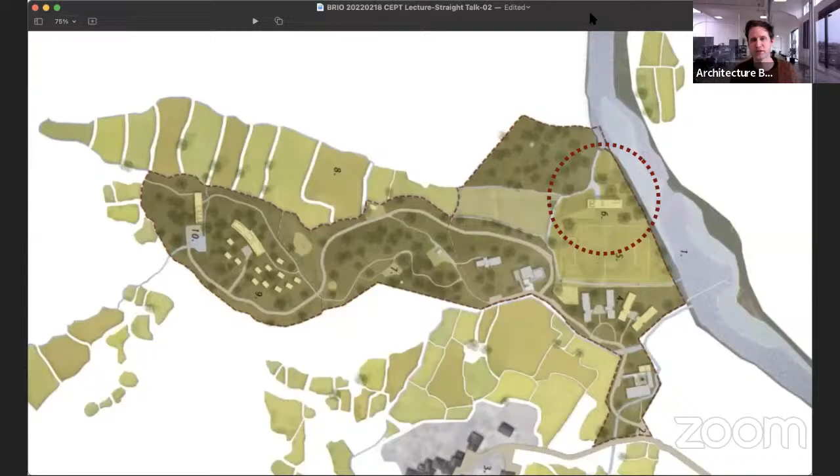While there's a forest and a big soccer field, many months of the year in this climate in Karjat it's so unforgiving - it either rains tremendously or it's so hot that it's very difficult to play any sports outside. So this pavilion is meant to create some kind of climatic shield to still allow play during those difficult months. We placed this pavilion strategically on the site, on the side of this campus, demarcating the dotted red line, at a place where three landscape elements come together.

There's a hill, a large lawn or soccer field, and a stream, and this pavilion is placed right where those three elements come together. In fact, it straddles across this stream - it connects on one side, the left side, to a hill, and on the other side, the right side, is the soccer field. And it really covers the stream.

There are several ways to get in and around this building. One, for example, is through this log bridge on the left side, and then you have to climb the hill and go up.

Another way is to enter from the... can you see my mouse, by the way? On the screen? Yes.

On ground level here, you can walk up to this deck from a jungle bridge, like a ropes bridge. And there's a ladder that takes you up to this level as well.

This building is ground plus 1, 2 floors. But in the submission drawings, we had a big issue, because when the government officials saw the drawings, they realized there were 2 floors but no staircases. So we had to explain that we don't want or need a staircase, because the landscape itself is a staircase.

This building is a challenge course extended into a building. There are other ropes courses and Jacob's ladders in this campus as well, and a zip line, and this is an extension of that. You have this log bridge that kids walk over, and these small elements teach children how to overcome their boundaries, because everyone has different levels of expectation and different levels of being adventurous or overcoming their fears of things they haven't done before. This is one of those.

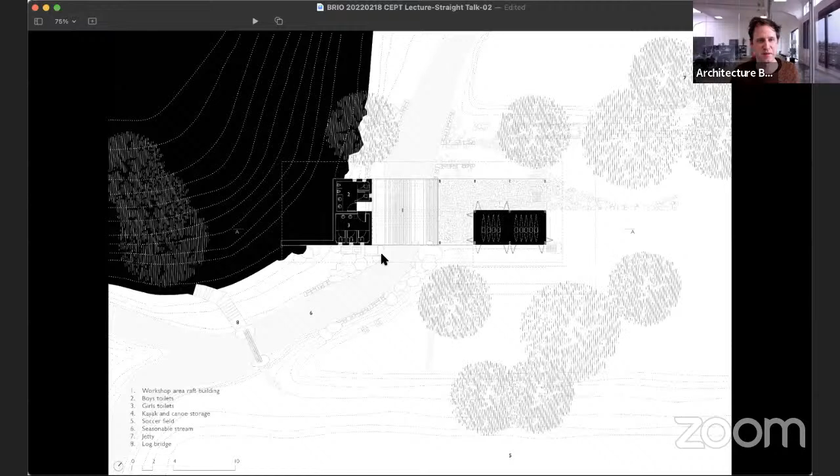Now, a rope bridge, we never designed before. We didn't know how to design it, and our structure engineer didn't know how to design it either. So we practically had to visit rope bridges and research how they are made. We realized we needed some kind of ropes underneath those planks, suspended from ropes above, from the roof. But when we started making models and had discussions with several experts, we also realized we needed diagonal ropes to prevent the bridge from swaying left to right.

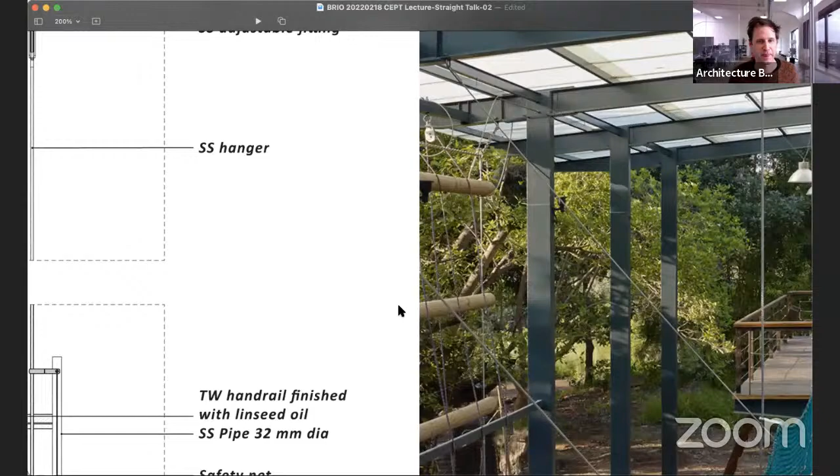And then here you see a detail, and I can probably zoom into this as well. So you see here the web of the steel member, and there's a bolt with an adjustable fitting that allows you to tighten the SS hanger. That's a rope, a steel wire. You see how it's connected here on the top.

And then there's also an additional plate, right? This plate actually stiffens the web of the bottom member of the steel beam to prevent it from sagging over time.

In India, there's not really any manufacturer you can go to and say, I want to order a rope bridge. So we went to the Mumbai port and spoke to several sea shipping companies, because they are very much used to working with steel ropes and fixtures, and we talked to them about how you can actually connect all these things together.

So this hanger goes down, and then at the bottom there's a wire holder. It is holding a T-section.

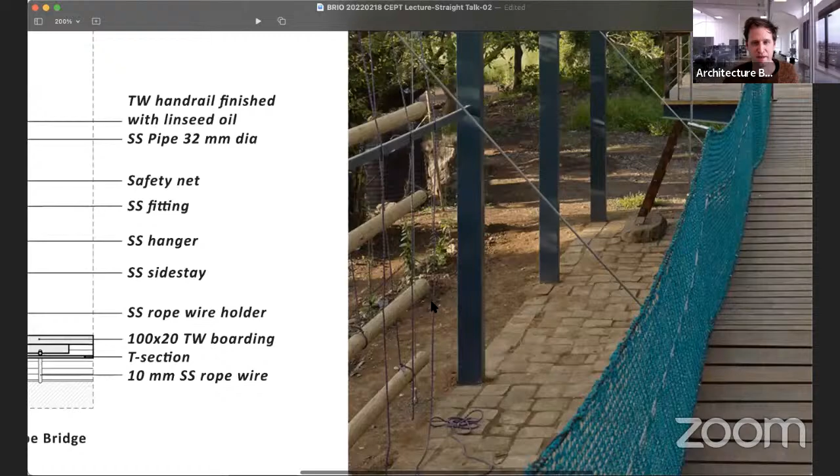That T-section then connects the wires on the diagonal, the straight one, with the wires on the right side, and it becomes this bridge. And then in the cross direction, you have several wires running in the length. On top of that wire there's an extra timber block, and on top of that is the actual boardwalk, the timber plank that you see.

This extra block below is there because this bridge is not a static thing, it keeps moving, kids jump up and down. And the wire is steel with a rough surface, and over time it will start rubbing off on the wood, and that wood will start eroding. So that extra thickness is really there to make sure the planks themselves never start eroding.

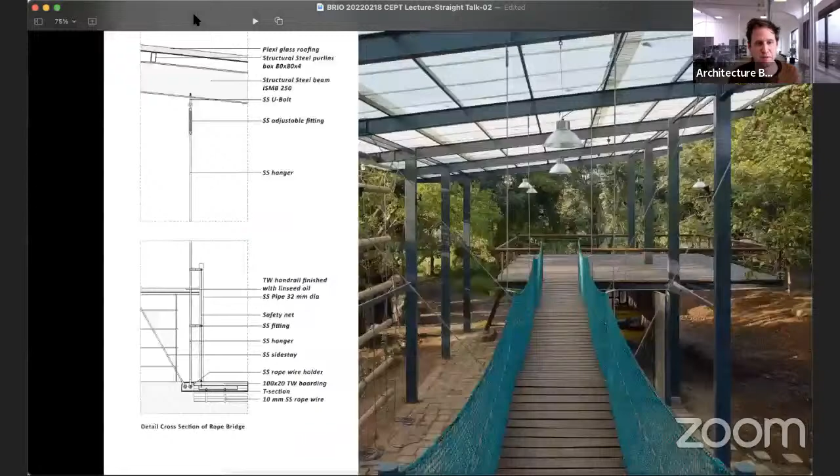Now, a bridge like this also needs to be maintained. It also needs to be checked every year to make sure that the fittings are still all right, and that they haven't corroded or loosened.

These are some of the fittings that we used in this bridge construction. And then you see here the project again in use, with more detail of that connection at the bottom. You can also see at the bottom of the bridge that rope below the thickened timber members.

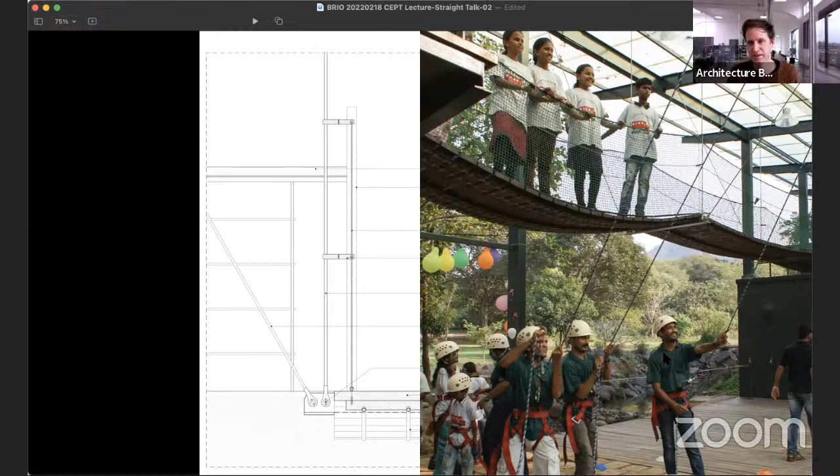For us, in this project, if there was any detail that was important from an architectural point of view, it was this one, because this building is all about connecting two elements of a landscape, a hill, a plateau, and covering this nala, this stream that runs below the deck. The bridge physically does that. So how can you make this a very light, easy-on-the-eye element that travels across these two directions?

But there's another detail in this project that we found important to show. There's a deck, and the deck is also the roof of a kayak stand. And of course this project has to be low budget, this is for an NGO. So how could we make a mesh screen that locks up these kayaks so that they can be safely kept?

You can see here another river behind, this is the main river. There's no fencing around this campus, so anyone from the village around can walk through the river. It's very shallow, and they can take canoes if they want to. So the only security we made was through this fence, a very simple L frame with a mesh fitted in between. You see here in the detail an L frame and then a mesh that's fitted onto that.

Now that was not an easy detail either, because that mesh that we bought actually came on rolls, and when you started unrolling it, it started all sort of bubbling. So often things don't work out that well, or they become very complicated and time-consuming to correct.

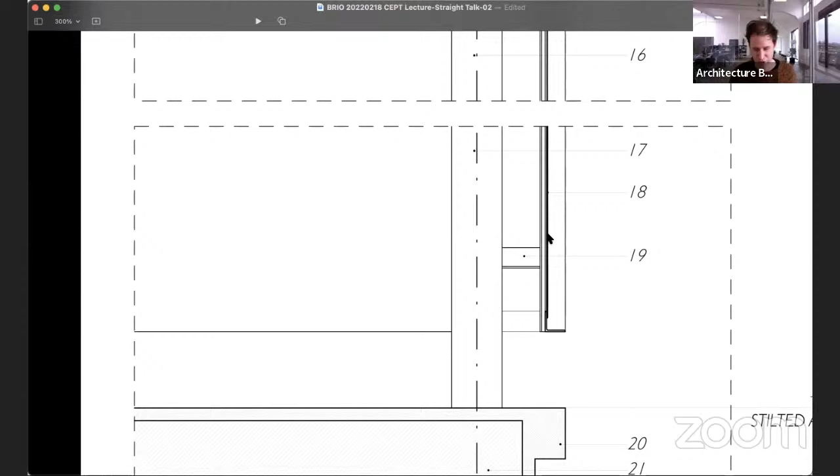This was a learning, one of our first learnings in building such a project. From then onwards, we started making mock-ups when we were doing things like this, things we hadn't done before and things that had to be tested out, so that we wouldn't have to correct each element after it was already made.

So that's the first project, and does anybody have any questions about this?

Does anyone want to ask any question? Do you have any questions? We want to ask how the bridge is stabilized, with vertical cable and a diagonal cable. On the other direction, what happens?

Okay Robert, I think then we should move ahead. Yeah, we should move. So do save up your question, but the next project I would definitely want a question from you.

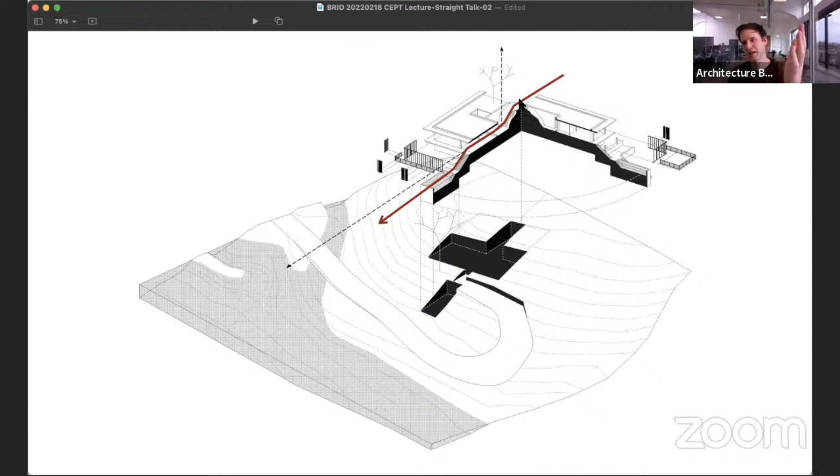You see again an axonometric. We have pulled out the building from the ground, from the hilltop, out of that black excavated portion. And then half of the building is sliced and rotated around the axis so that you can see really how it relates to the landscape.

The top of the hill is marked with this red line - at the back there's a courtyard with a rock-cut staircase that runs through the kitchen, through the dining room, down the staircase, over the pool, and then further down into the landscape. And then these lighter elements, like the decks and the windows, are pulled out of that axonometric again.

Now here you see pretty much all the materials that are in this project. You see a stone wall, this is limestone. Then you see this thin concrete edge with a bigger beam that retains the soil above, and you see a steel beam here at the bottom that you see in section as well.

In the section you see also that stone wall behind there. You see the bamboo screen that hangs from the roof and is connected to the beam on the side here. You can zoom into it.

So you see that this deck here with the timber planks is not supported on the ground, and that's really to make it look and seem as light as possible. This beam is actually suspended. It's suspended through a rod, this rod that you see here, which is fitted on top in the slab.

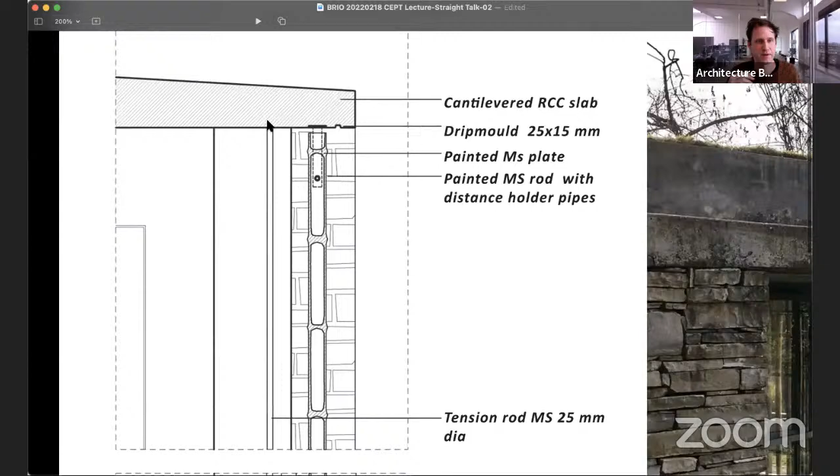And then to the side of the beam, there's a vertical plate. That plate has a hole in it, and that hole has a rod in it, and the rod has small little pipes, and between the pipes are actually the bamboos that are sort of arranged like a chain. So let me see if I can zoom into that as well.

So you see here a little bit that plate, that vertical plate, and you see there's a rod with the pipes. The pipes are there to actually keep the distance between the bamboos. And wherever that plate is, these pipes are again halved, so it sort of separates the pipe again, to keep the bamboo screen in place.

There's a plate here and another plate over there, and then you see this on top, it's suspended from the slab. Now, we didn't actually know in advance exactly where we were going to have those plates suspended. So what we've done is we've actually cast a whole steel strip in the slab so that we later could weld these vertical plates in any position along this slab. It allowed us to be flexible there.

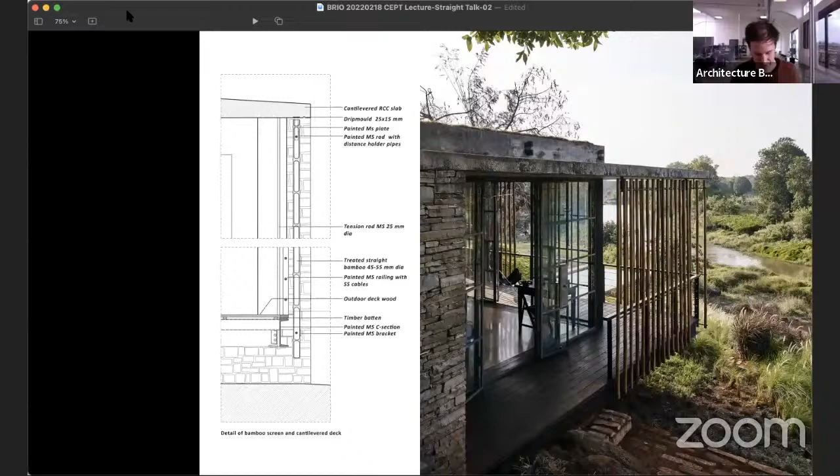Yeah, you can actually then see also here on top that plate that is cast in the slab. The drip mold, which is of course very important, because otherwise you get streaks of dirt along the inside of the slab. This allows the water to drop down before it hits the bamboo.

And here images from the other side. And here what I want to sort of show, what you see much more clearly, is these suspension rods over here and here that are holding up the veranda. You see it here once more.

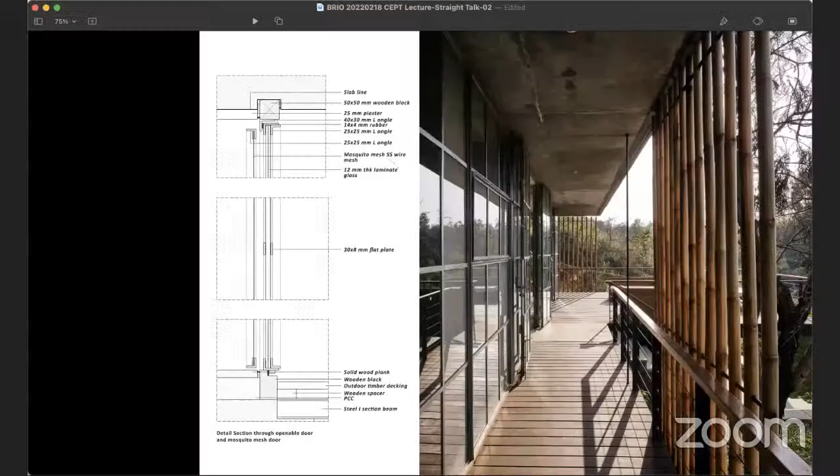You see that the bamboo has actually three of these rods running through. One is at the bottom, straight, and it also has the ability to even move after installation and warp. So this keeps the bamboos in place over that full length, which is, I think, 0.9 meters, if I remember correctly. And then, of course, at the top as well, where the ends are connected together and where it's suspended from.

Now here on the left, you see a detail of the windows. The windows that we made for the previous project were in steel with a steel mesh inside. Here we, for the first time in our projects, have used window frames made out of steel with glass infill. And in the past, I think even CEPT still has windows, steel windows with glass, but not anymore.

Does it still have it? Yeah. So it's not very generally used, but what we really wanted to emphasize was a sort of a mesh of glass and steel around the side of the house that faces the river. And the only way to do that as thin and elegant as possible was with steel members.

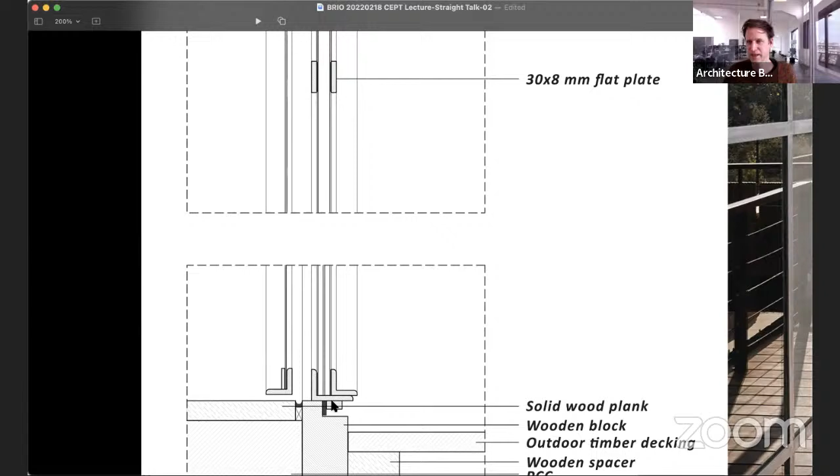So the beading of a frame is 25 by 25. And then the outer frame, the fixed frame, is 40 by 30, and then there's a fixed frame outside of that, again 40 by 30. But to make a window that is also sealed, you need to make sure there are overlaps and there are no gaps in the windows. So there are additional elements, like for example here at the bottom, that prevent water from going in from outside into this floor. Little beads that are connected to the steel that are creating an overlap.

You see here from the inside, the openable doors are swung to the outside, and then there's another set of doors opening up to the inside, which is a mosquito mesh. So it allows you to keep the glass windows open but close the mosquito meshes so that you still have ventilation. This is a quick video of how that actually functions. This is the master bedroom.

Yeah, so she's very enthusiastic. You can see her opening and closing these windows and the mosquito meshes.

Now, when you have such a thin frame of 25 mm, you cannot fit normal hardware on it anymore, so you have to start customizing this hardware. These, for example, are bolts that lock the doors in place. You see a little hook on which they rest when the doors are open, and then they can be lifted up, turned around, and go into the floor to lock them in place.

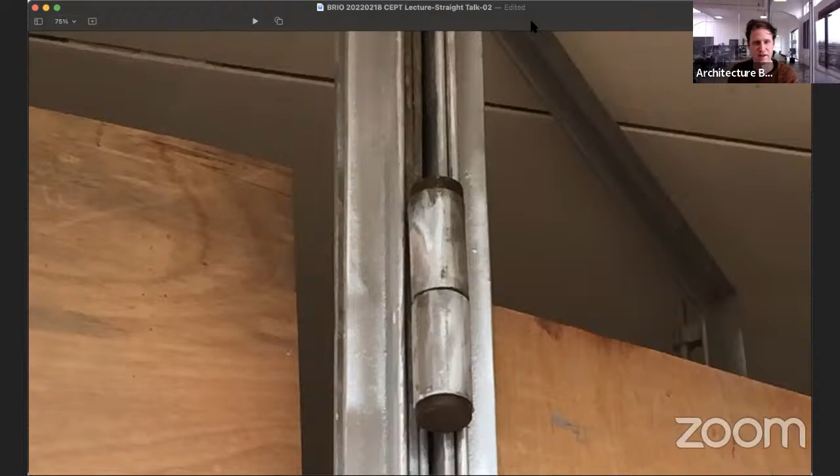Not everywhere was this successful. In some places, the process of hot dip galvanizing didn't work - it got damaged too much. If a really large part of that galvanizing layer gets removed, it doesn't heal back. In places like hinges, we couldn't hot dip galvanize it, so we had to improvise with a zinc paint, which is eventually still a paint, so it can still come off.

Yeah, it's not the most ideal solution. We were also very worried about how it looked eventually, because you see a difference in the finishing of the part that is sprayed versus the part that's hot dip galvanized.

And then you see here a bathroom where there's a different kind of window. This is facing the view again, so we wanted to make sure we could look over the windows to the outside even while showering. But we also wanted to make sure we had the possibility to ventilate it. So here we've used a system which is like a casement stay, a bracket, a friction hinge that opens up. And then between the bathroom and the master bedroom, there's cabinetry that's inbuilt that doesn't really have a brick wall - it's just cabinetry that separates the two spaces.

So any questions about these details, about the making, or any mistakes, or any questions about the process of making this?

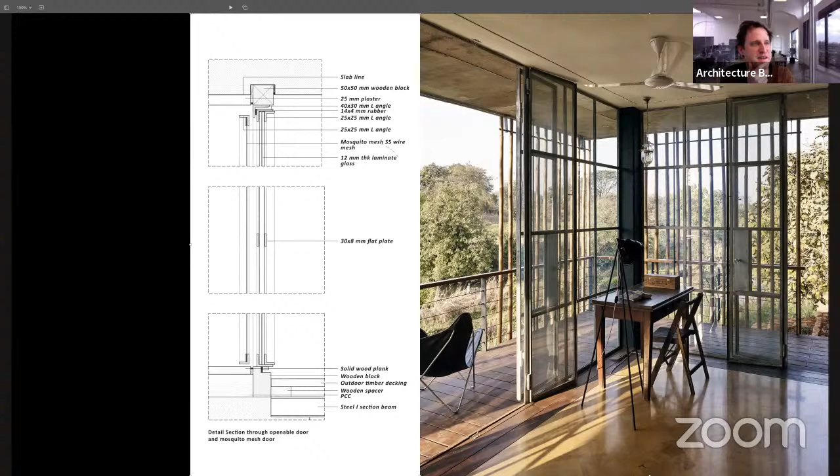So actually, at the bottom of the foundation, I can make a quick drawing. Since we are here, can I do a quick drawing? Let me see if I have the possibility here. You can annotate. Yeah, I was trying to find my annotate button now. The button is somewhere, but where is it on the screen? Usually I can find it, this time I cannot find it.

Yeah, thank you. The point is, what I try to explain is, it's intensive, right? You have to do a lot of architectural work, a lot of construction work to eventually allow a building that sort of hides, that's embedded in landscape. But eventually it also makes sure that nature can grow back and grow over and around the building. While this temporary disturbance to the surrounding is there, eventually over a long time, you have a building that is much more nature centered in a way.

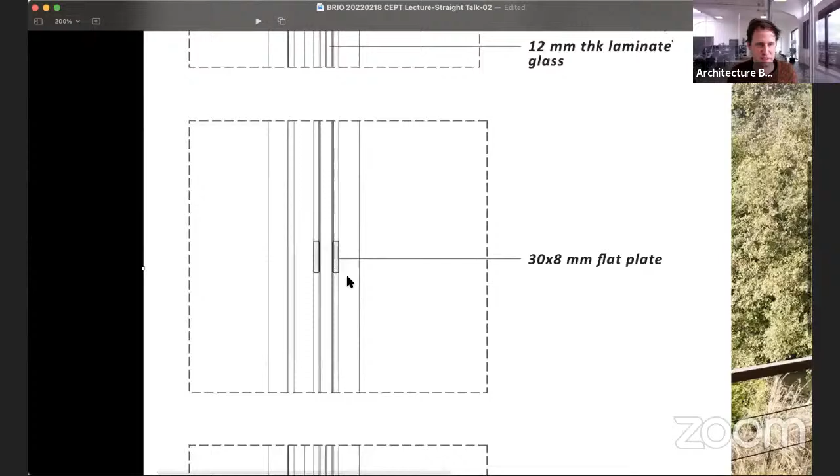We didn't really need it for thermal expansion, which is what you also asked. Although there is, of course, also a gap here - I'll try and show you. If there's thermal expansion of the steel, it could expand to the top; there's a small gap there that allows it to increase in height. But the steel window is protected from the overhang from the sun, so it doesn't have a lot of heat gain, so I wouldn't expect this to really expand.

Yeah, I hope that answered your question. Yes. Yeah, Tarun.

Hello, hi sir, I'm actually not from CEPT, but I have a question. The details here are really detailed, and you can't really do it if you haven't planned before, so all of the things have to be ready before you start construction. How long did you take to figure out this entire project? Just to know the timeline of how long you had taken to detail all of this, just out of curiosity.

I think our design process was 1.5 years, if I remember correctly. But it wasn't because of this detailing, actually - it was a design process that was long. It was a stop and start design process where we had several iterations of requirements from the client, smaller house, bigger house, small again, bigger, and then also waiting for the local panchayat approvals.

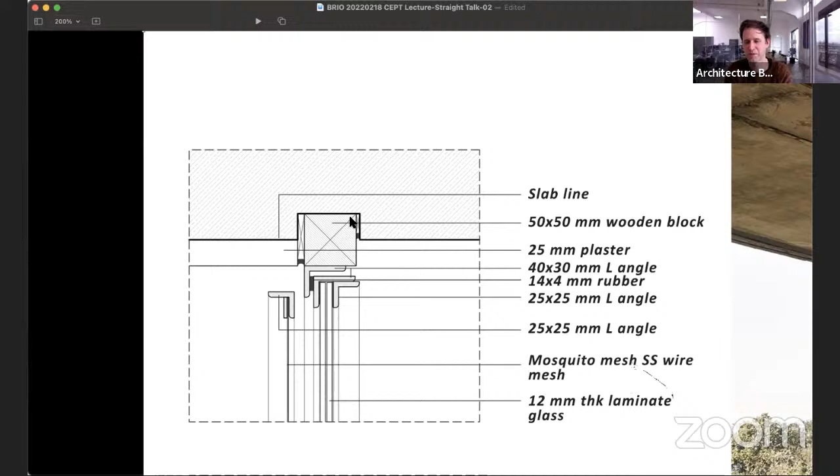Yeah, you're right, all this has to be planned before. If you don't plan that cavity in the shaft and you have a mistake, you won't be able to rectify it again. Thank you, sir.

Anyone else? Maybe I can ask a couple of questions for the students.

One thing you need to ask is, let's say, a very interesting detail of one angle section overlapping with another angle section, because earlier Z sections were made, and that's what CEPT has. But this is again a very interesting way to deal with two sections, because one of them acts like a beading putty if you treat it like a timber section. So one question would be how is that outer angle section, which is 25 by 25, fixed onto the main angle section, which is the frame of that opening? Yeah, that's right. Do you have a picture?

Yeah, you see here that this is our improvisation to the Z section. These beading putties that are on or between frames, because typically a Z section would allow you to have this piece to create the overlap with the fixed frame.

The question you had is about that inner frame - you see the hole there. It's a grub screw, a screw that you see in the screw hole here, here and here. That's how they are connected to the side, because you can't screw into the window, you have to screw vertically.

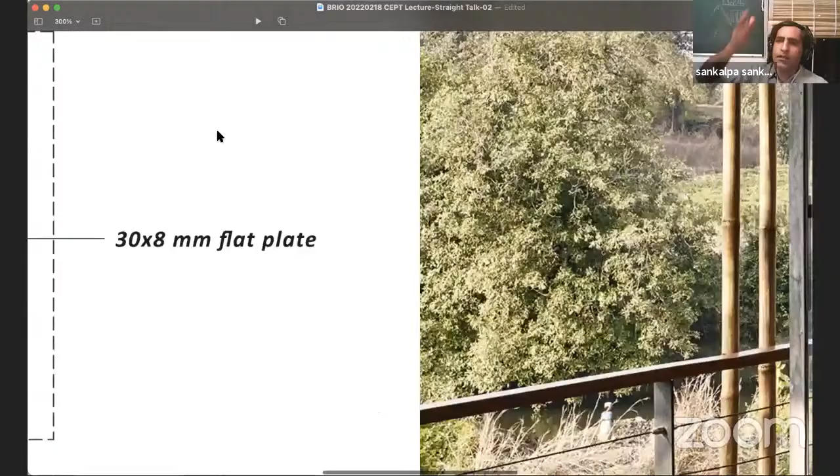Now the second question you need to think about is if you look at the mesh and its size, and at the beading putty of the mesh, it is a plate. Generally plates are slightly difficult to handle in steel. So one question is how the mesh is done - sometimes it's stiffened by rolling a plate and then you screw it. But in this case it's very light and uses a plate, so how is it fixed? Is it directly grub screwed into that section?

I can show you in the picture, though I can't zoom in more. Yeah, it's there - that's how it's screwed. So it is fixed, fixed horizontally through the mesh, which also makes it difficult, because if you have to cut the mesh it may get damaged, and potentially those fine little lines of the mesh may get damaged, right?

It's also difficult - we need to see, because at the corner conditions, if you've got plates folding the mesh into the plate, the corner conditions become tricky. So what I'm trying to point out is that once a detail is shown in 2-dimensional, you need to think in 3-dimensional in order to address it - connect back from the back.

So the third question is that if you look at the outer section shown, the channel section was being lifted from the slab using a pipe - outside, where you were showing the outer layer with the bamboo screen. That section, the questions immediately start coming: the channel section is resting on the pipe, so obviously a lot of questions emerge about its stability. Is it intermediate resting, with members on the corners that have a support, or is there some intermediate support for the channel you can't see in the section?

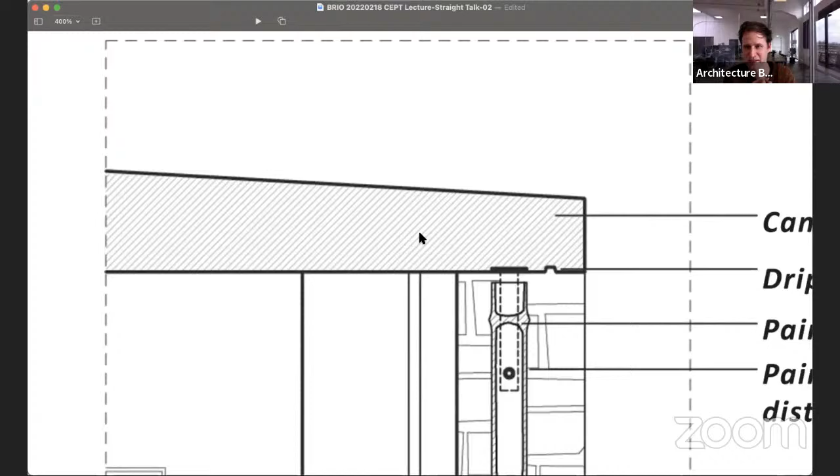So from a sequence of construction point of view, it's amazing, no? Because if you look at the bamboo screens, there's a plate running that was thought about. Similarly, the precision of getting these two rods, because it connects to the reinforcement - all of this is a great challenge. Constructional tolerance is quite interesting - how has somebody thought about it sequentially to anticipate where all the errors would be, and how do you negotiate the error? For example, the niche in the timber in the inner section, in the slab inside - and then you start seeing this vertical member.

So this female threaded joint has to be exactly in this right place. If it's a bit to the left or a bit to the right, the rod will not be straight. I don't know exactly in this picture whether the bamboo was not straight or the rod was not straight, but you can see that they are not exactly in the same plane.

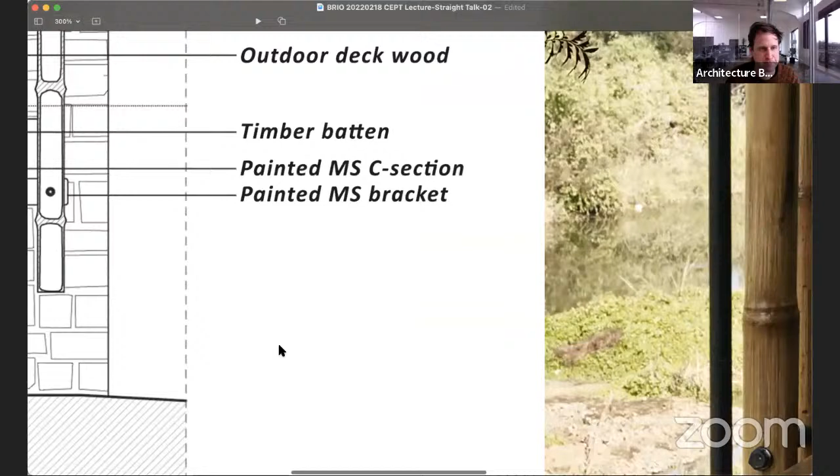We need to learn, when we are doing this, in which direction there is tolerance and in which direction there is not. You can't play around too much at the bottom because you have the railing—if you had to move the bottom joints of that rod to the left, it would hit the railing. To the right, you could still shift it a bit, because in this drawing the rod is fixed to the back of the beam, and you could keep a little smaller or bigger gap than required. In the other direction, you can place the rod wherever you want along the beam, so there you are allowed some tolerance, but not really in this left-to-right condition.

And so I do know that one of these rods is not perfectly aligned. I remember being really annoyed with that. Yeah, tolerances are something so difficult in construction.

The bamboo is hollow, no? Or is it solid bamboo? It's hollow. It's behaving all right in terms of cracking? In terms of cracking, it's been behaving very well.

We did several different kinds of coats over the years on it. Initially we did an oil, if I remember correctly, and the oil worked well but not in the monsoons—after the monsoons you would get a lot of mold attaching to the bamboo. Then a year later we did a varnish over the bamboo, but we used the wrong varnish because it started melting in the hot season. So it became a little sticky, which attracted lots of little bugs and dust that got stuck into the varnish, which then became nurturing for mold over time. So the year after we had to strip that down again, and then we went back to oiling.

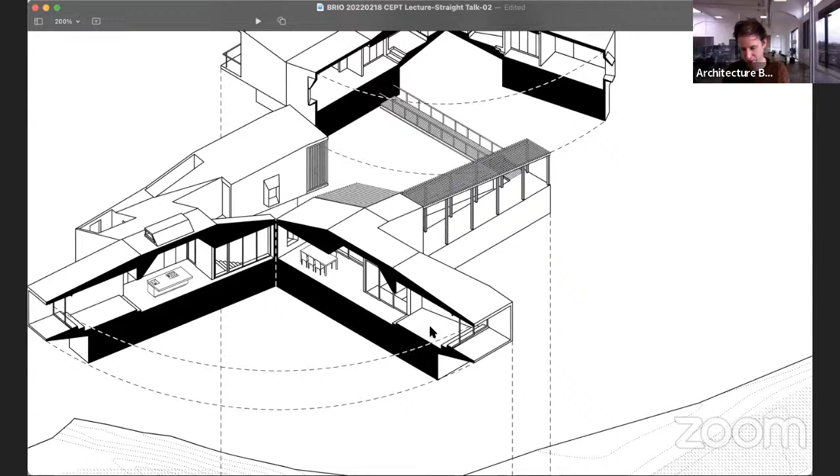Here the exploded axonometric is in two parts: the main house and the annex, which has a master bedroom, are both extruded, and then again they're folded out so you can see the inside of the section of this house. You see how we're playing with volumes where there's a very strong difference between the inside volume and the outside volume, emphasizing what is termed a poché, which is the space between the inside envelope and the outside envelope.

And that's also emphasized in the materialization, right? So the inside envelope is all white, all white painted surfaces, and the outside is this raw concrete—much more rough, solid and monolithic material that encompasses the entire building.

You see the middle section here with that emphasis of a sloping roof, a roof that sort of expands out into the landscape through different arms of the building. They're almost like an insect stretching out between different existing trees. And then an inside surface where in some places it's just a plain flat ceiling, and then in the center of the house it sort of expands up, reaches out, and opens up.

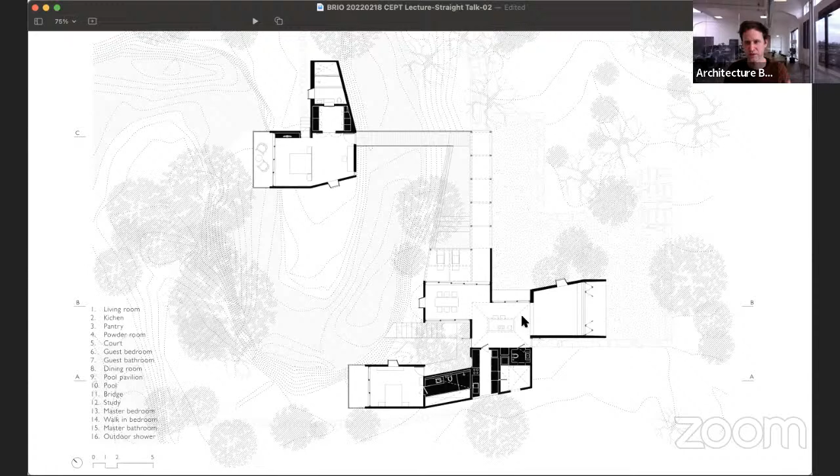This is happening in the plan as well, this expansion and contraction and shifting of axes across the plan to create a dynamic relationship with the land. That's what you see in this picture too. You see an axis towards the courtyard, a diagonal axis across the main kitchen, but also a linear axis from dining to kitchen to living room, which is raised a little bit, and then the vertical axis of this pyramid shape on top.

There's very bad soil in this place of Alibag, called black cotton soil, which expands and contracts depending on the seasons, depending on how wet the soil is. You have to go down with your footings, your foundation, below that soil layer, so that the building doesn't settle one side in a different way.

But then on top of that, you also have this stream that runs through the building. The stream is now nice and gentle, but it can also become a very violent stream that fills up almost touching this bridge. There's an enormous amount of water rushing down the mountains, pushing against these walls, pushing against the concrete, so that concrete is extra heavy, placed on the bottom strata, on the stable strata.

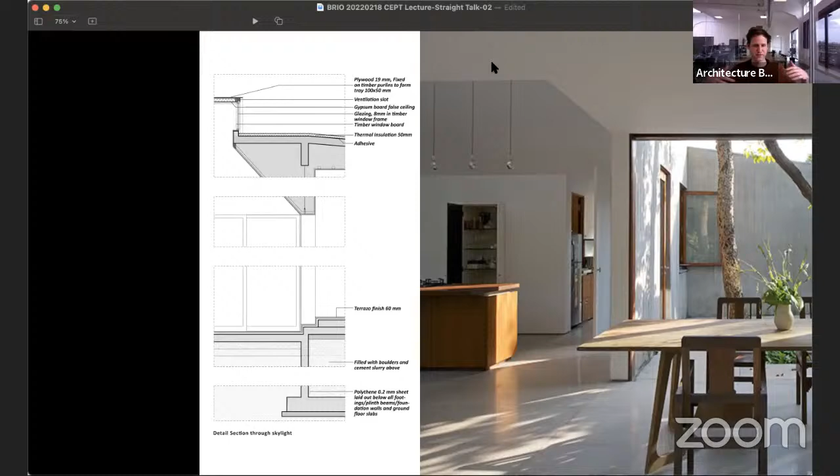Yeah, and in a way it's very simple, right? It's just plasterboard on framing that's hiding behind all this whiteness here. But still, when you're in that space, it feels as if it's sculpted out, as if you're walking into the inside of a boulder, into a cave.

But then it expands, and then it lifts up. There's a skylight which floods the space below, and of course the skylight is the most risky thing you can do, because it always leaks — at least as long as you haven't detailed it properly. But what we did...

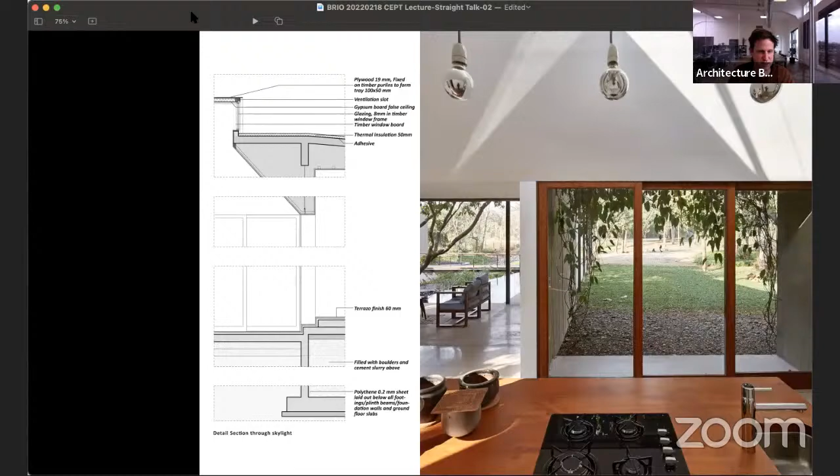The roof structure is a timber frame, a sort of boxing of different frame timber boxes. There's a gypsum board at the bottom and then a ply sheet above.

Then this is filled with insulation. Of course, there's insulation on the roof itself, otherwise that concrete slab would heat up a lot.

There's a small gap between the insulation and the plywood to prevent dampness or moisture build up. And then that is covered with PVC membrane.

Then there's an L section that creates a drip mold that makes sure that the water that falls over this edge doesn't fall directly on the glass.

And you see here a timber frame and a timber frame again. This timber frame is actually more of a schematic drawing. Eventually, this timber frame also overlaps with that upstand, because otherwise you would have water that sort of seeps through.

The gap that would eventually be existing here through expansion and contraction.

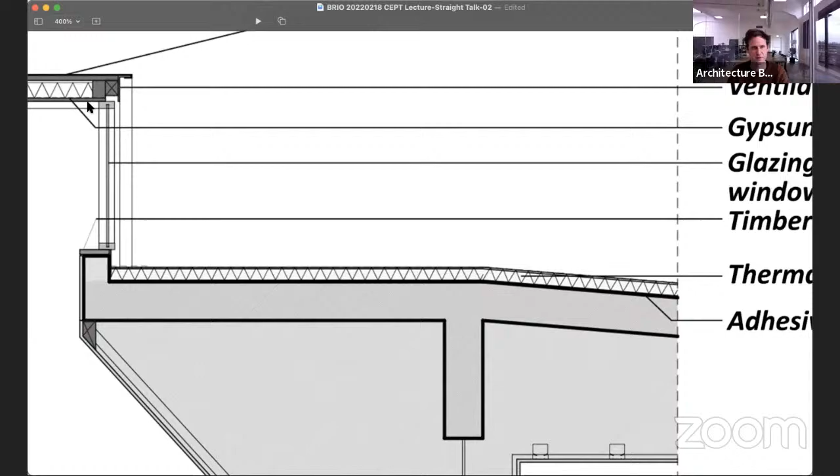Going back to this, yeah. Everywhere in this building, we either have only floor-to-ceiling windows, sliding windows, or these kind of doors that are floor-to-ceiling.

And wall-to-wall. But in some special cases, we have small punctures in a concrete wall, which are these sort of window boxes. And these window boxes we wanted to create as elegant as possible.

So, and as simple as possible in a way. So it's a steel box with two straight sides and two sides that are chamfered.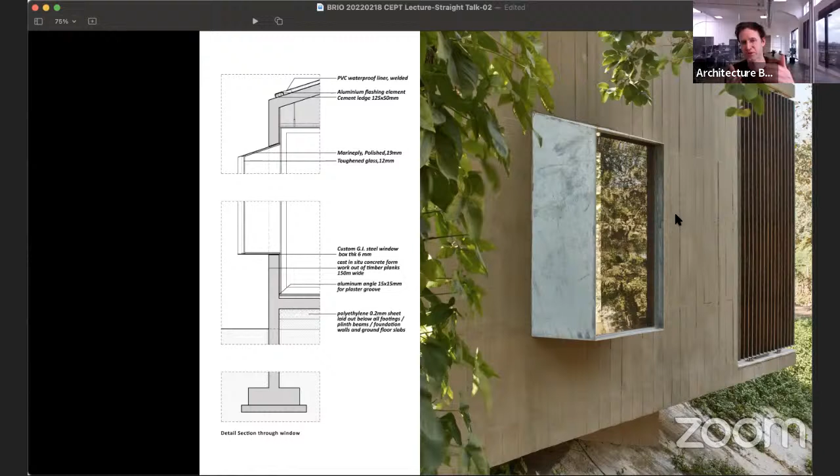The top side is chamfered so that it allows water to drip down. And the other side is to really visually create a cone effect from the interior to frame the view more dramatically.

I'll show you here from the outside how that looks. And these boxes are placed in plan in certain axes.

So here you actually see through a series of spaces, eventually through an outdoor shower courtyard over here. And then even a small little shotgun window in that shower that looks outside.

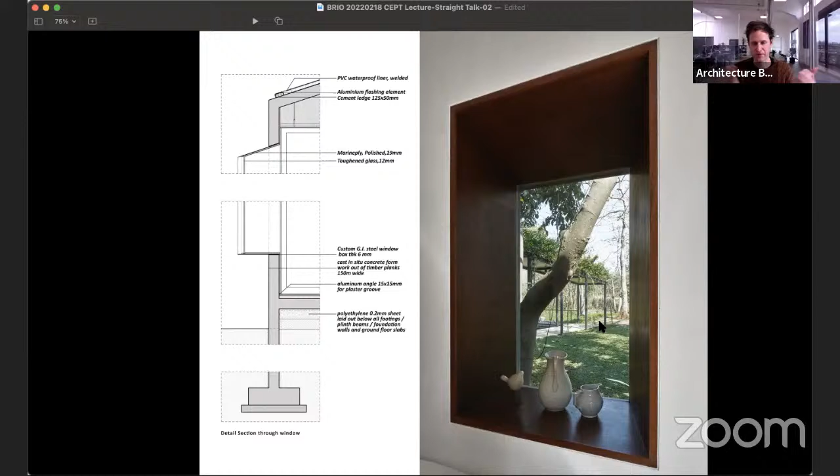And here from the inside, you see how that framing, the cut-off pyramid shape, emphasizes that view of the surrounding of the tree trunk outside as well.

And here from the outside. So this is a bit more detail.

It's maybe a little not so crisp, but it's a steel box, a steel plate. This is also hot dip galvanized, so that there's no maintenance required, no painting required.

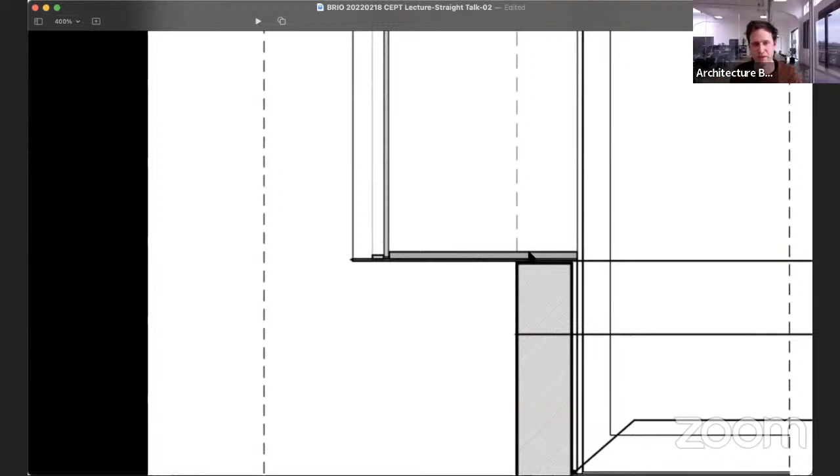Then on the inside there's plywood, which is simple plywood, polished in a small beading putty on the edge. And then on the outside, there's glazing, again, a galvanized glazing beading putty.

And the glass is just fixed in between that. And then we use silicone to seal the gap.

And a little hole at the bottom of this glass. So even if there would be some kind of water seepage through this, some sort of crack between the silicone, the water doesn't flow down this plywood and then starts rotting it. It then drips down below.

So here you see the detailing. I think eventually we had trouble, because we realized how we would actually place the glass.

It was actually fixed before the galvanizing happened. So this whole box goes into a galvanizing bath, and to make sure that the gaps were sealed properly, it was first welded and then hot dip galvanized.

But then if you have to put the glazing, you can't normally put the glazing from the outside. So here we actually had to put the glazing first.

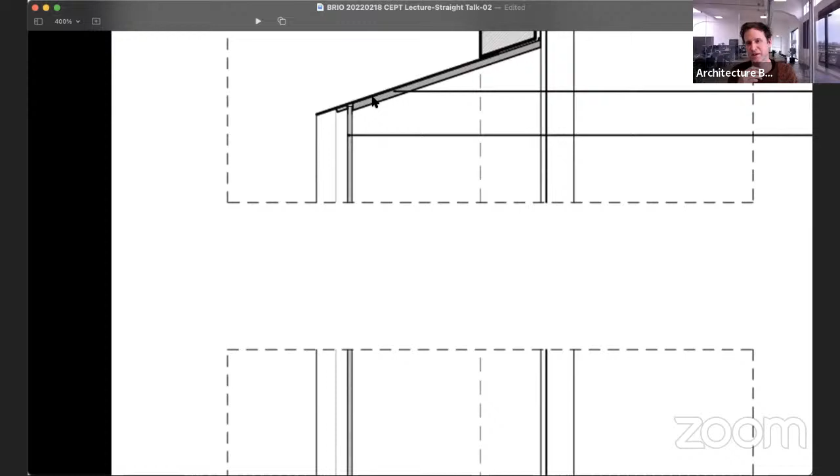And then we put the plywood on the inside, but we actually, in reality, kept a little strip at the end, which we later filled up with another piece of wood to fix the glass in place.

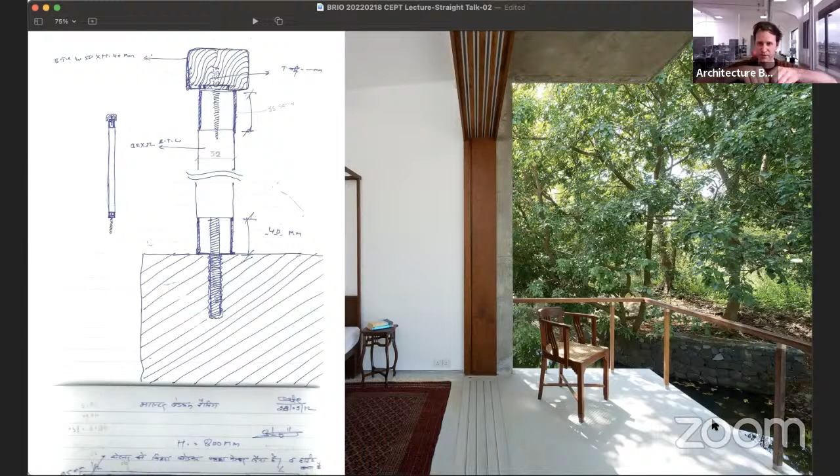But the span between the timber rail posts is quite large, and the timber itself on its own would have sagged or even cracked if you leaned onto it. So there's also hidden steel plates inside the timber rail that's screwed from below.

Any questions about this?

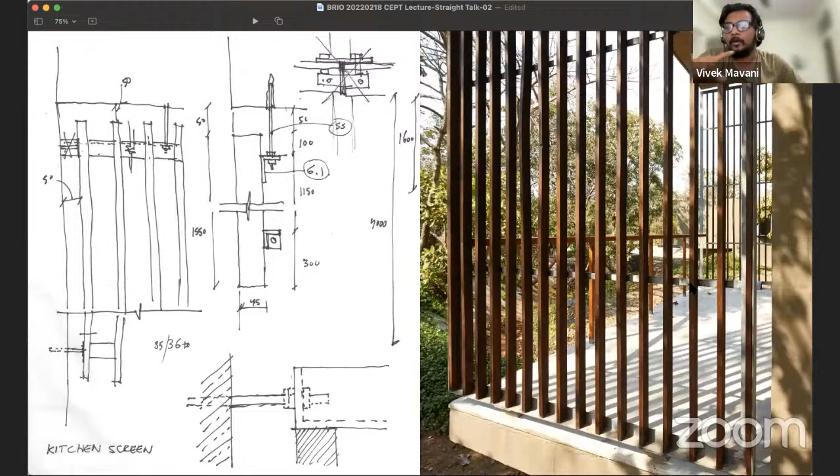I have just a small curiosity about that metal box window. So first you open the concrete, so in a sequence of construction, all the boxes insert in the opening and then screwing it, or like how does the metal plate and concrete join at that?

That's also a very good one, because now remember the issues that we had. We envisaged that if we made the provision for this window box in the shuttering work, we would have to pre-make the boxes, because otherwise all these metal boxes had to be of a different size. So we had to make one sort of form that is inserted in the shuttering, and that could repeat in other places as well, so that this straight line and this diagonal line, in both section and plan, would exactly match in all places. And now you do see that it actually perfectly matches, right?

There's a small silicone joint of about 5 mm that seals the gap. And it has happened in all places, but actually not because we made that form the same. Eventually it still ended up that we had to make these boxes custom for each frame, because somewhere in the pattern work and the casting, something shifted a little bit here and there, and we had to make the whole box frame again, first in plywood, test if it fits properly in the concrete wall, take the measurements, then make it out of steel, test it again, send it to the galvanizing factory, which is about 40 kilometers away, move it back to site, and then install it.

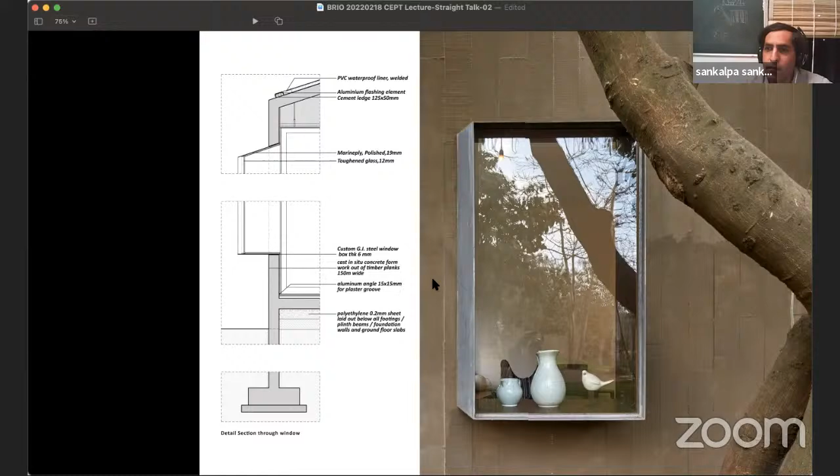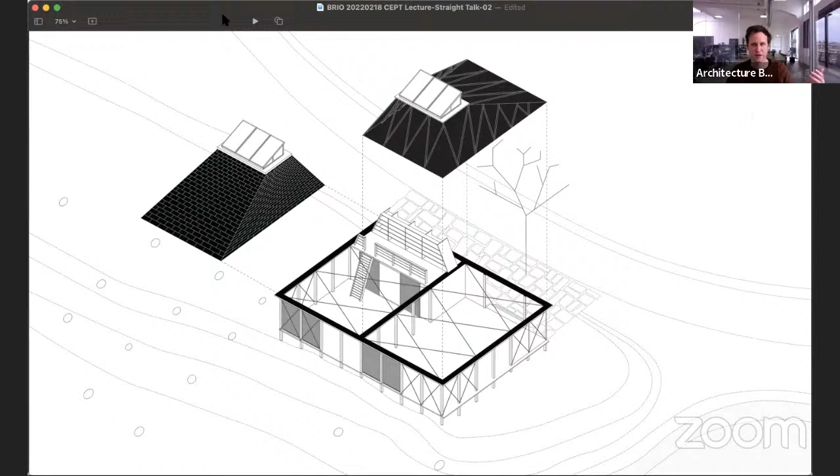And this building then consists of these two pyramidal shaped roofs that are slightly offset from each other, on a framework of steel columns that are at a grid of 1.5 meters.

And this is a drawing which shows all the elements that have gone into this project, all the steel components. I think this doesn't show... yeah, it shows the rock as well, in scale.

They're not all in the same scale, but here there are columns and the rock, then beams, tension rods, bamboos, all the junction elements, kind of emphasizing that this could be like an IKEA puzzle piece, and it could be assembled but disassembled as well.

I've got here a few photographs of the site during construction. Again, it's hot dip galvanized, especially here right on the coast it's even more important, otherwise this would corrode within a few years.

You see that these beams are all bolted. It doesn't necessarily mean that it's the most pretty—what's much prettier is just a nice I-beam directly connected to a steel column, welded neatly. But if you do it with nuts and bolts, you have to keep margins, spaces and gaps. You have to have extra insert plates, and it becomes much more messy and complicated in a way.

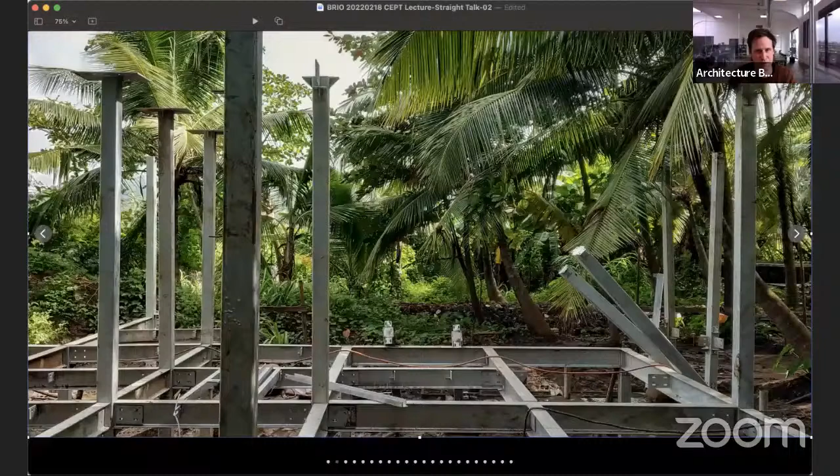Here you see the assembly, and the side—this is a piece that you'll see back in the roof design later on. Here, there's another epoxy layer on the steel. These are plates, this is a plate which is for the tension member that keeps the roof in horizontal stability.

These are little hooks on which you can hang art. It's also galvanized, so it's already pre-done before the construction, before the thing is assembled. You see how partitions are made.

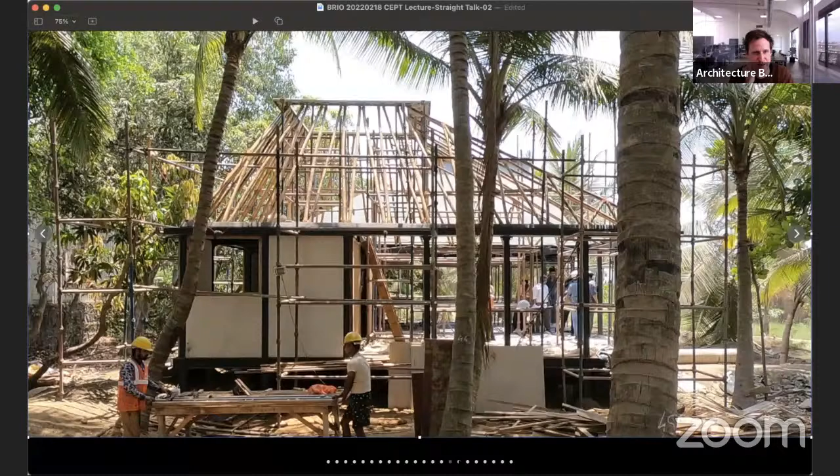Then the roof assembly—see the bamboo roof, I'll talk about the bamboo roof a little later. But this is essentially a pyramid-shaped roof with a diagonal bracing of bamboos. And then here, using the finishing stages.

Here's the detail section of the building.

These steel columns are placed on boulders, but actually the boulder is cut because of the bad soil condition. There's additional brickwork below the boulders to create a sort of mass. It's not necessary for the weight of the building, but it's mass to prevent the building from lifting up during winds, and there are cyclones in this area as well. So it's mass to keep the building down. This cut through the rock is actually to anchor the steel columns into that base of brick below, that you see here in this detail.

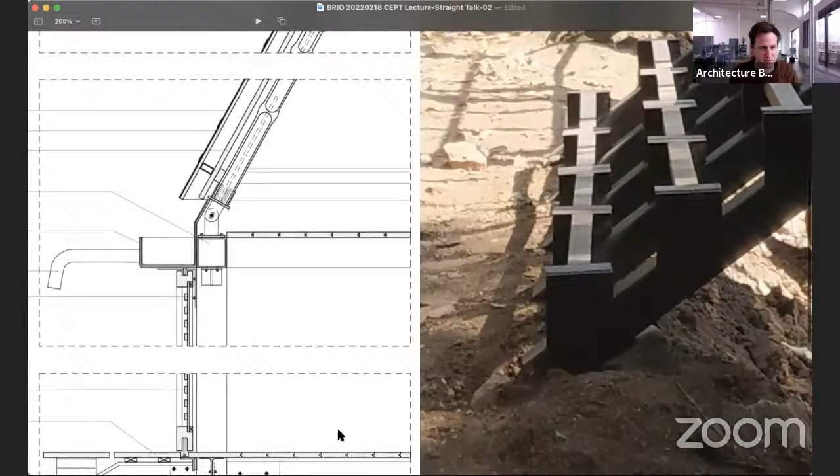With the insert plate here below, you see all the assemblies of little plates that connect those I-beams together. There's a timber deck directly on the steel floor, the columns, and there's a box section on the top.

And then a horizontal box section that frames it in the other direction. Then you see here an insert plate for the bamboo structure above.

That bamboo structure has timber battens, then bison board that you saw in the previous pictures, and then a layer of bituminous sheeting. The gutter for this building is a folded steel plate that overlaps with the bison board and gives a little projection and protection of the screens. A rainwater spout is connected every 2 or 3 meters or so.

You see how that comes together in elevation. This is a wind bracing that prevents the building from tilting sideways.

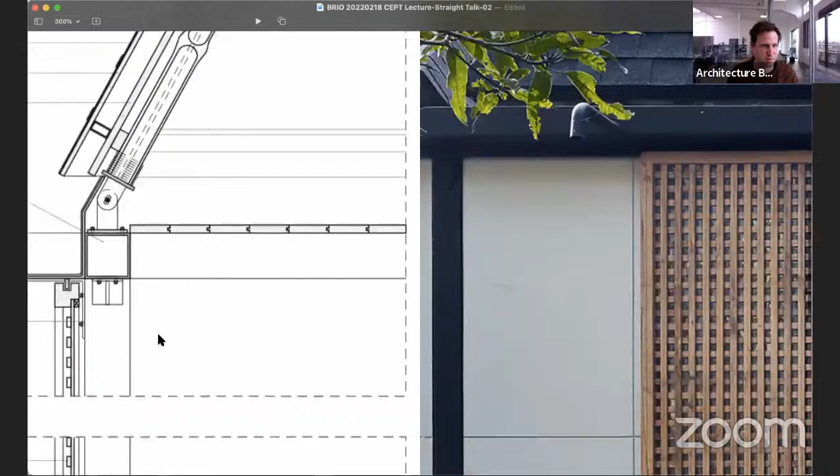Here you see a very simple detail of a timber screen that slides across the wall on the outside of the elevation so that it can open up completely. At the bottom, it's just a timber frame with a wheel set on an L angle, and at the top it's just a steel strip on which the timber frame with the groove slides. It's just a sort of spacer and distance holder.

You see the little spouts here on the facade as well. On top you see a skylight, and the skylight has openable windows which are motorized. This allows the hot air that accumulates in this dome, this pyramid-shaped roof, to escape from the top. The top of these skylights are covered with solar panels.

The sizing and framing of the roof is exactly per the size of, I believe, 3 by 2 numbers of solar panels, so that it fits in perfectly. These solar panels get hot—it's eventually just a piece of glass which heats up the air just below it, creating a temperature difference, which then encourages natural ventilation inside the space.

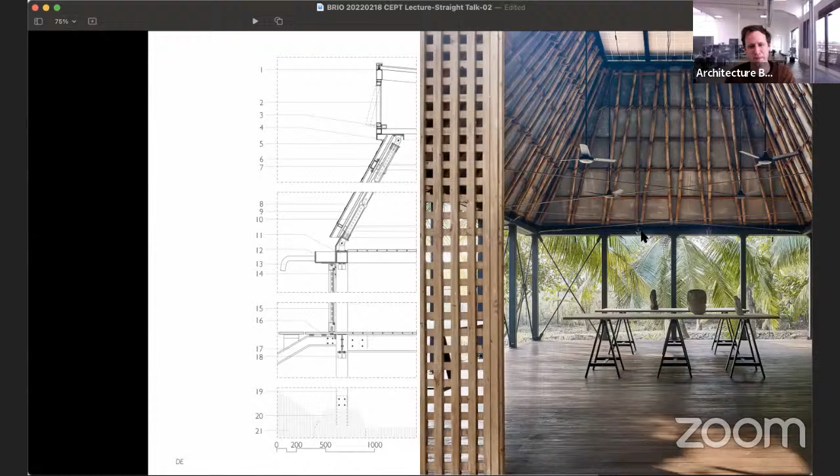Here you see that from the inside, and you see the skylights again with this overlapping detail, aluminum framing.

It's storming. I don't know if you can hear it, but it's very heavy here outside.

You see the detail through the center of the building with this timber ladder that takes you up to a loft, and these bamboo poles placed diagonally, supporting the skylight. Then here you see the roof drawing, which is a folded-out elevation—the skylight in the middle, these 4 elevations folded out, and then the front elevation also folded out with the columns and the wind bracing here.

These bamboos are placed diagonally because it creates a very stiff framing across the surface of the roof. When something becomes a triangle, it's inherently stable compared to when something is placed parallel and forms a rectangle. So we use that principle, which is in a way also aesthetical, that diagonal framing—it's also a structural element.

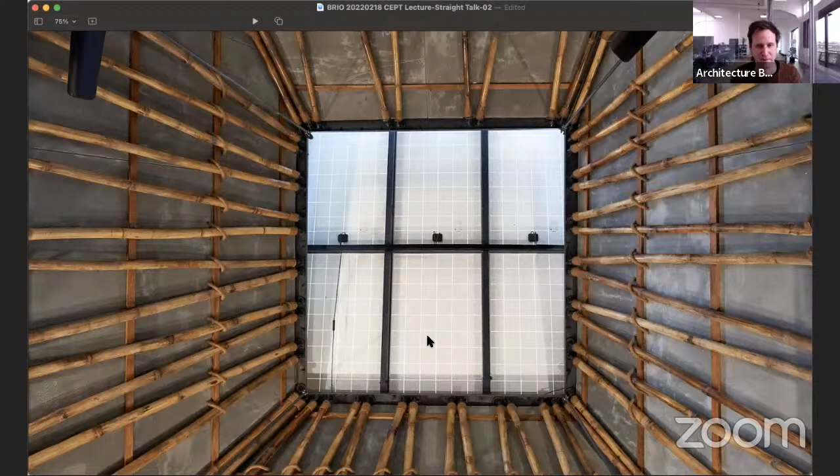You see here how this comes together. Now you can imagine that if this happens, all your bamboos are placed in different axes, both in X, Y, and Z direction. So when you have a building which is prefabricated, where everything has to be nut and bolted and nothing can be welded, this means you need to design a special piece to allow that flexibility. Otherwise, you could probably weld a rod into this beam in the right direction and fit a bamboo column or bamboo beam to it.

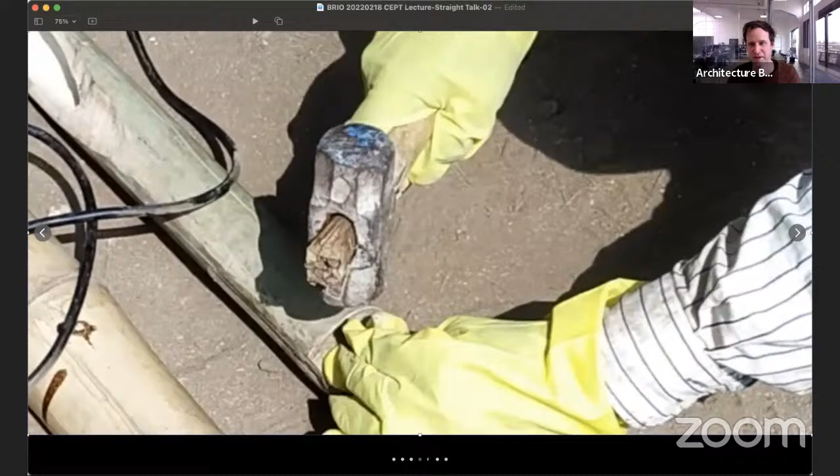I'll show you that detail again later, but here, just the process of treating as well. Some projects have different timelines and situations. The previous project where we did bamboo, we used a fumigation method. Here we used a different method because we didn't have a fumigation possibility—we drilled holes in the bamboo and filled that up with a solution of creosote, like a sort of tar, then plugged that back in with bamboo plugs, and kept it for, I think, a week or so.

And that's how the bamboo gets its life. The end joints of this bamboo are basically reinforcement rods that have a profile to them, and then this end connection is inserted. This is circular, and it has a plate and a hole, which allows you to change or rotate it in the right direction.

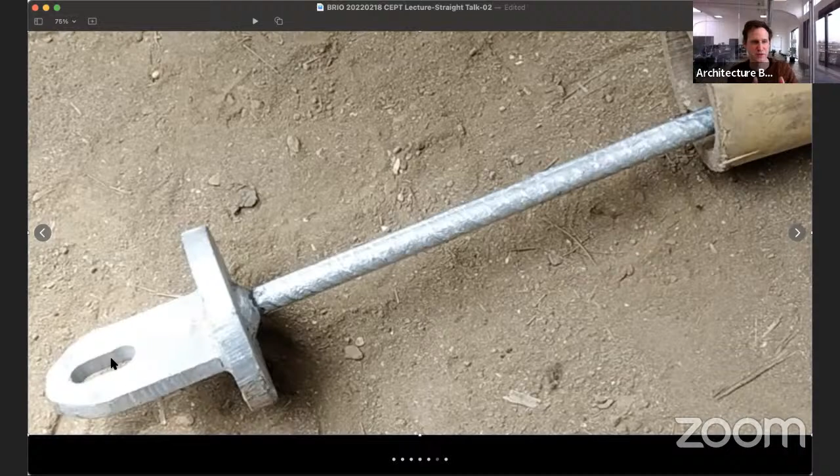After filling, this gets inserted, and then you fill it up with concrete or cement to fix it in place. To prevent the bamboo from splitting at the ends, we did this threading around, and this threading has to be done in a very particular way. The rope has to be made wet first, and then you tie it with a lot of strength, so that it really fits in and is not allowed to expand.

You see the roof construction again. These timber pieces, the bamboo of course has different thicknesses and diameters, so this timber piece has different thicknesses to accommodate the level difference between the bamboo and the bison board sheets.

Eventually we had to tie these bamboos together to the main structure, because without this, the whole frame was acting independently from each other, the bison board as well as these bamboos. So what we did is we created sort of C sections that puncture the roof and hold the bamboo together, tying it. The rope here is purely decorative.

Here you see the detail of how that plate inserted in the bamboo is rotated, and the top that sits on this beam is also of a similar kind, a circular plate with a vertical plate on top that has holes and can be rotated in all directions.

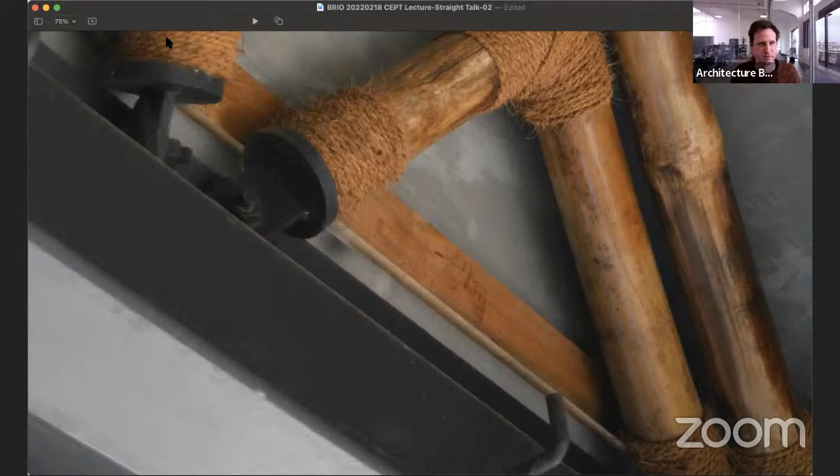Anyone has any question? Shivani may have some questions.

Hi, Robert. No, I don't really have any questions. It was just really nice to see from the context how the project turned out. So yeah, it was a trip down memory lane for me.

Yes, nice. Any personal stories? No, it was just how you mentioned the coming together of the prefab elements, and even the bamboo and everything that happened on site, the back and forth during the treatment was certainly an experience, the learning process.

This is that member I was talking about on top of the beam that has these horizontal slots in it. This allows that piece to actually rotate on the beam. And you see them here.

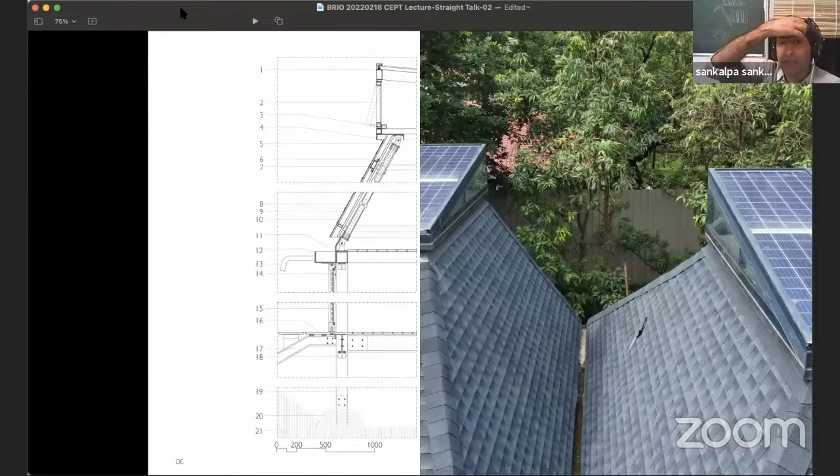Maybe I might tell you, I don't know whether you have questions or not, but it's very interesting when he's showing especially the sequence of construction in which he deals with bamboo in particular, because how you fix that bamboo piece in the sequence becomes important. You have to ensure that, because both sides of that have a steel cap or a steel shoe, and you need a detail that you can easily fit into.

The second and most important thing is to deal with the aberrations in the geometry of the bamboo over the cross section. The timber becomes that forgiving tie, which ensures that the industrial material can sit on a natural material, and timber mediates between the two. These are other things extremely important for you to note down.

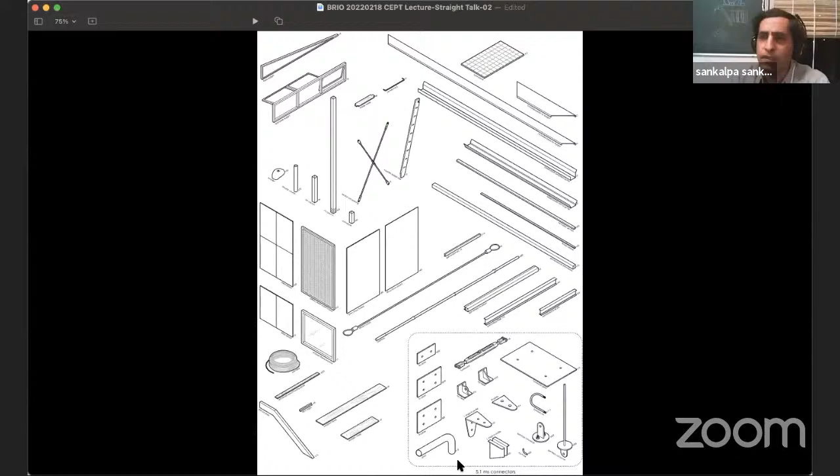In the sequence of construction, you can see that the whole steel member is sitting on that bamboo section at the top, and then the rest of the elements come in. So you should think about it from the point of view of integrity of the structure, because there's a heavier member coming and sitting on the lighter member.

It is quite strong in the plane. The only problem would be out of the plane. How do you tie it? So the little bit of shakiness that Robert was talking about is perhaps because unless you tie the horizontal member, or in this case the inclined member, properly, it won't be stable.

It won't be stable because of the ductile quality, the ductility of the bamboo, the stiffness of the bamboo is different from the stiffness of the timber, which is different from the stiffness of the steel. So you've got three materials working together, and they need a certain degree of integrity, either through form or through a brace or anything. That's a very interesting point Robert was making when he talked about connecting it using a C sort of section, or a channel.

I think that's a good point, and you've sort of intuitively already understood there's some sort of secret happening in this roof, right? Because you've got a nice stiff plane here, stiffened by a diagonal in this surface. This top is also quite stiff - it's just a folded steel plate with more length, more width on the right because it's a more shallow sloping roof, and lesser width on the left and sides because it's more steep.

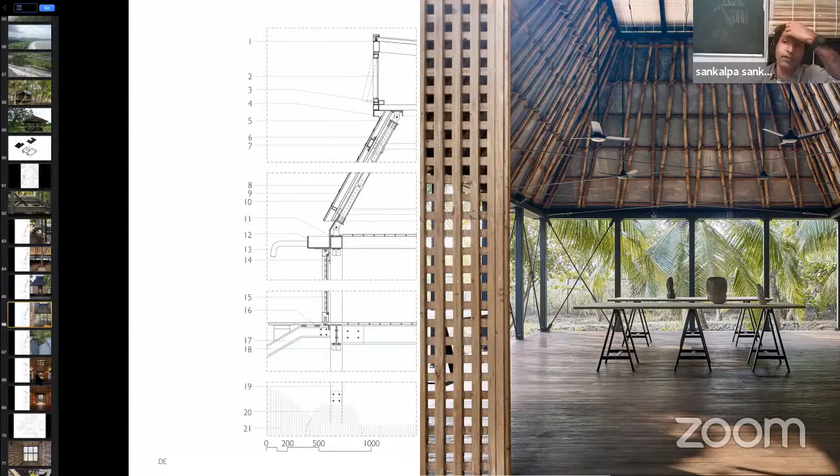That's right. The horizontal or the gently sloping slope has a very different challenge in a way, and the challenge there was actually the sagging of the roof - potential sagging of the roof. This part actually, this member potentially could sag down. It will sag down. If it is not tied, it is going to sag down.

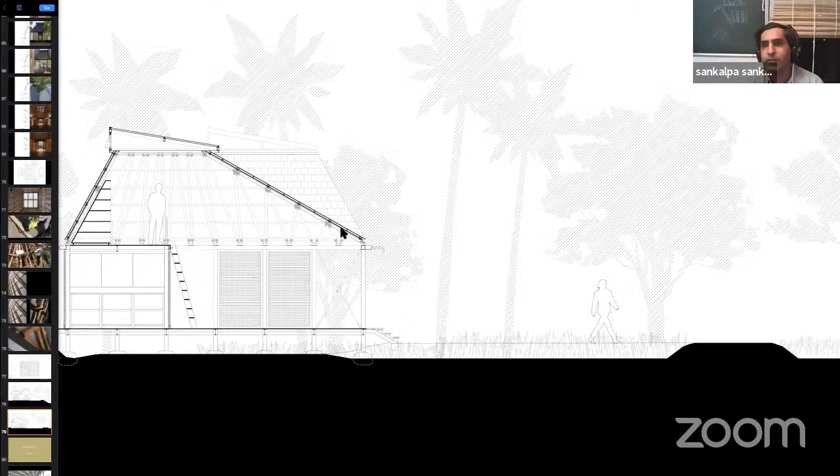In fact, one of the iterations of our design was to make it sagged, to make it a little curved, which would be very good. The thing is, that will work with its nature, because anything more than 1.5 meters in bamboo is going to sag if you are using a single bamboo section over a period of time. So this is only retained by form.

The longer one, I'm saying - but the point is, it's quite... I think if it would have been up to us, we would have made it curved, but it became more complex for the contractor that we worked with. Yeah, but you resolve the problem for the contractor by adding the timber - basically the timber tie - because that has solved most of the problem. Once you do that, all the aberrations are covered up. So the detailing itself works so well with the rest of the thing. The only thing is it requires a lot of effort to customize it.

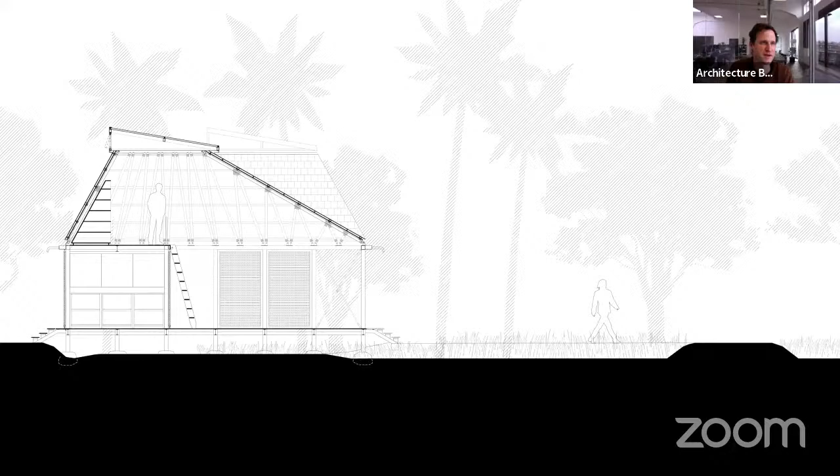I'm happy to continue if you are all keen on seeing more. How many projects are left? Let me see, I think I have 3 more projects, but I could choose one. Or you could choose and maybe quickly show, because otherwise it will seem incomplete. And maybe in the end, we can have a 5-minute discussion.

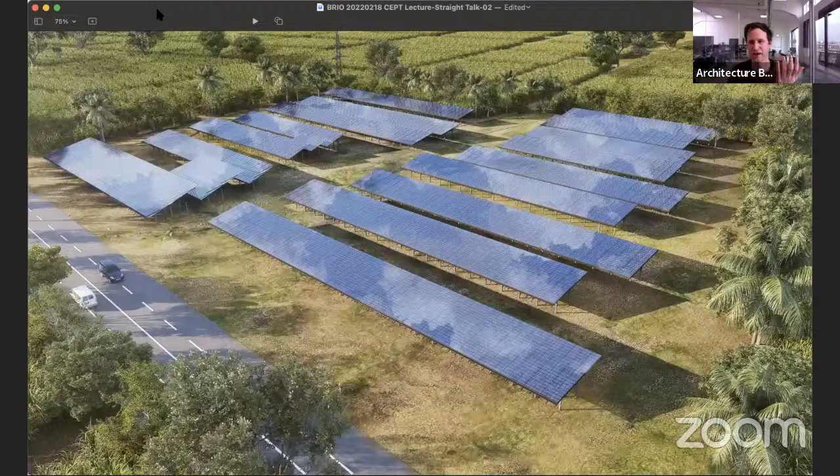Okay, this is a project - it's a housing project, a concept for a housing project rather. Let me try to be really brief and say it very bluntly. The concept behind this housing project is to create a solar farm - you have a roof, and then you build housing underneath it. The energy that you produce through the solar farm you consume, but we've calculated that about 10 times extra energy is produced in a situation like this, which you can sell to the grid to finance the construction of the project. So in essence, it could be a regular solar farm, but then with housing underneath.

If you build something like this, you need to make sure it's a model that is actually self-financing and self-sustainable. This is not just an architecture project, it is a financing project. It's a financial model, it's a financial innovation. You need to build something like this very efficiently, because if you don't, you're not able to deliver the promise of making housing affordable.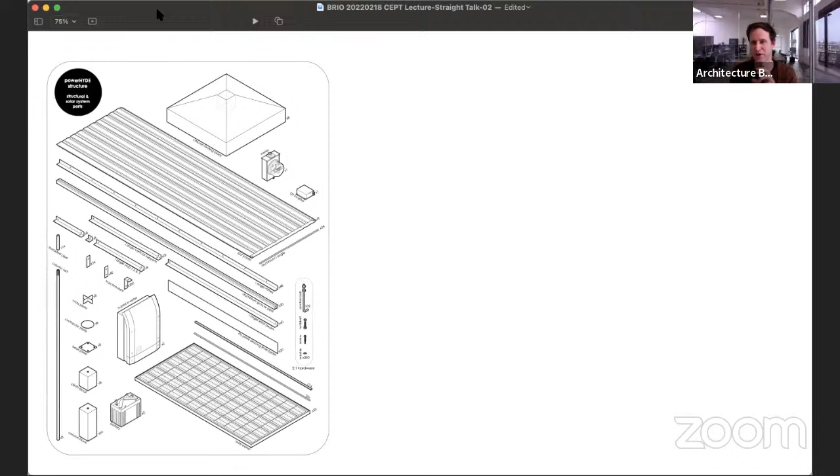Part of this construction is completely prefabricated. The part that needs to be built so that you can start placing solar panels on top and start producing energy is completely prefabricated, like a normal solar farm. Everything else, that's what you see on the screen on the left - these are the elements that go into a house like this. Everything else is customizable and adapted to local conditions. And then there's some off-the-shelf products like a toilet, a tank, a geyser, a pump, and wiring.

Normally, prefabrication happens in ultra dense conditions where it's all about time. In our case it's also about time, but the cost of land and construction is so high that you can afford big machines, big manufacturing equipment to put this all together. If you do this in a rural context like India, you cannot afford that. You actually have to make something that's manufactured in large masses, but that's also very small, compact and modular, that can be transported easily and built up together without any equipment.

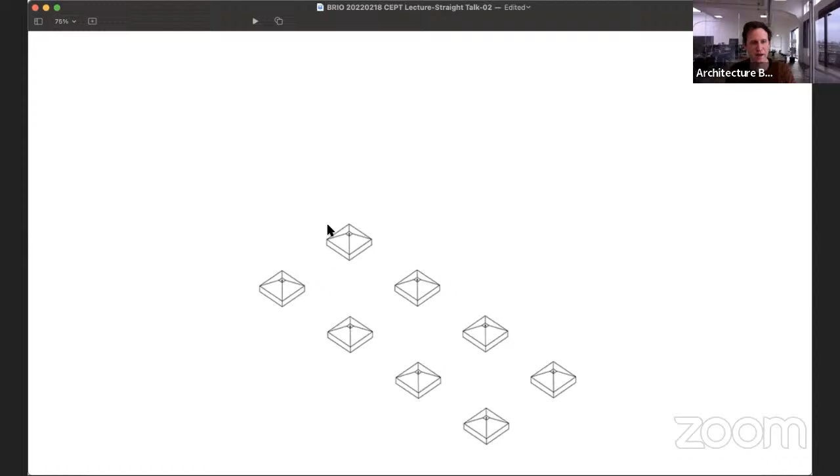So a normal column, which would usually require a machine to be lifted into place, is actually made out of small modules, 400 mm high, that are strung around a central rod to combine them together.

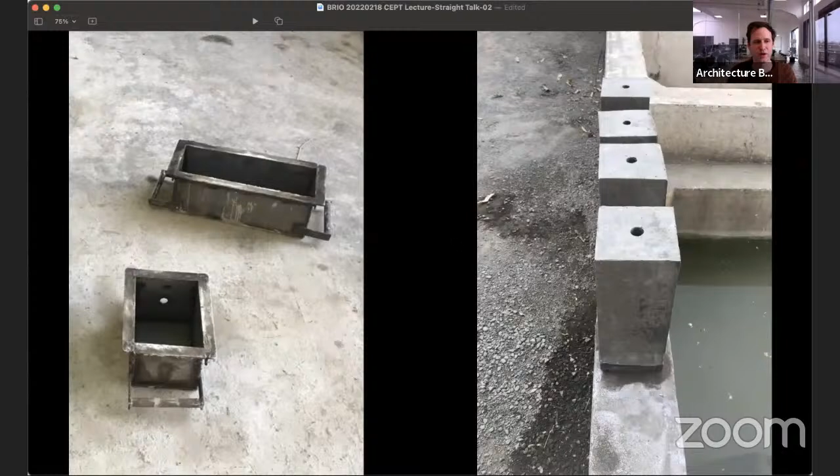You see here the elements of a particular section, and here a mock-up we've made of how a column can actually consist of small pieces strung together on a rod, and structurally work in a way like this little toy, right? Compression and tension.

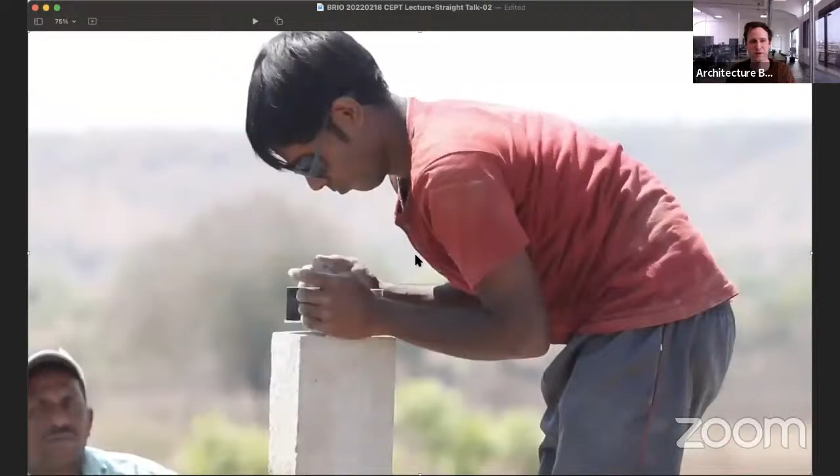And here we did a test of how it actually could be made and how it fits together. One block weighs, I think, 20 kilos, and can be easily lifted by one person - no equipment needed. Then on top of that rod, there's a joint that ties these blocks together to really create the compression and tension within that rod.

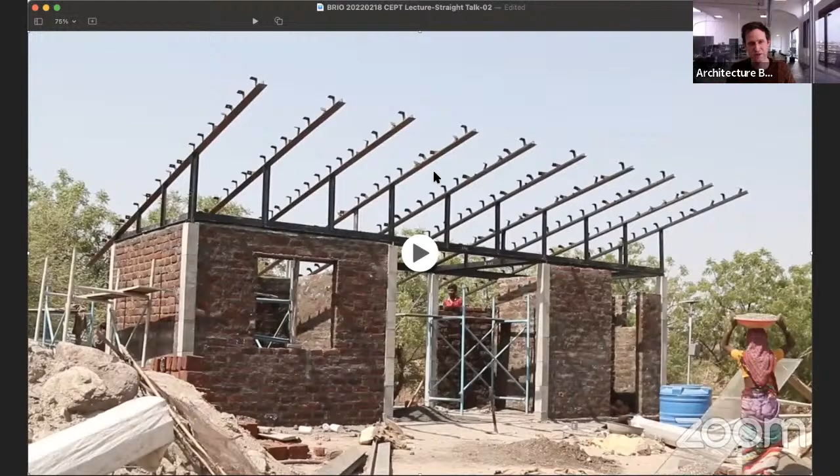Solar panels are put on top of the roof. And this is the prototype we built.

I'm just going very quickly because there's not enough time.

This is a project that's still about to complete, 99% done. It's built on a hill, again in Alibag in this case. This hill is very much exposed to all surrounding villages and roads, and from the sea you can see this hill. So we want to build a home which is very significant in size - it's about 12,000 square feet. We want to build this home such that it would settle in with the landscape.

But we also realized that we wouldn't be able to pull off the trick of, let's say, the riparian house. It had to also be a house that in a way is proud and doesn't shy away from presenting itself. So it's a bit of a combination of both: there's a part that's embedded in the ground, embedded in the hill, and a part, two linear pavilions, placed in the direction of the view, with its tall facade facing the view as well. Here you see these two pavilions, two linear roofs, and this entire part here is the footprint of the house. So half of the house is actually underground, but this allows us to break up the scale of the house into two parts, while still keeping them connected to each other.

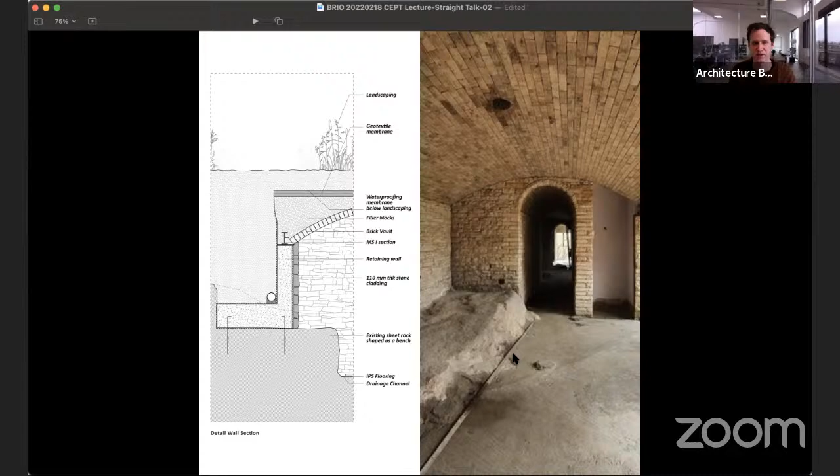This is on the exterior facade. You see that this vault is actually supported on a steel beam. And in the space between the lintel on the outside, which is of stone, and that vault, there's a sliding track, and these steel sliding windows are sliding across that.

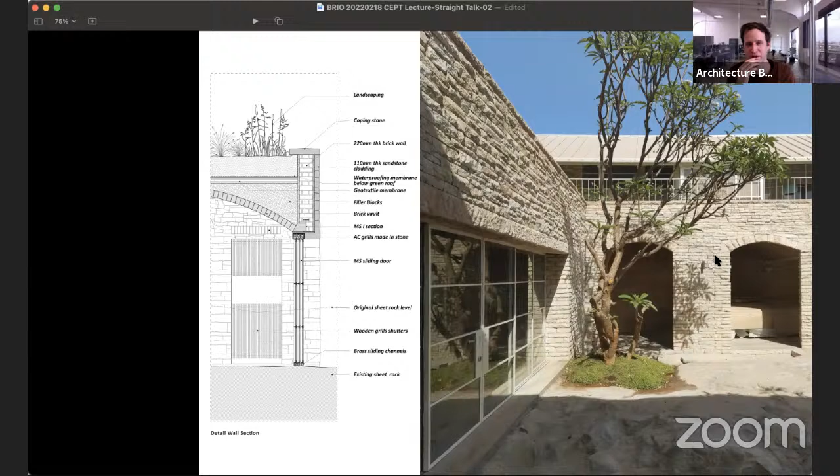Here on this side, it's a much more structurally genuine sort of design, where actually there's a vault or a sort of an arch shape in stone that supports the stone on top.

And then on top of that stone wall, you have a large stone capping stone, coping stone, that protects the wall below, and that separates this wall from the garden above. And the waterproofing membrane goes up against the wall and then turns around underneath that coping stone.

Shall I do this one as well? Last one? Yeah, let's complete it. Yeah.

One house that we're building in the Himalayas, a very different climatic context where it snows, where you have a 180-degree view of the Himalayan mountains. Nanda Devi is right here in the middle.

And what's wonderful about this kind of site is that it's so full of history, geological history, deep time history, right? These kinds of rocks that you see exposed were at some point at the bottom of the ocean, in between the landmass of India, islands that came off the giant mass that was at the South Pole and eventually hit Asia and then created this sort of upthrust, and you can see it really play out here, right?

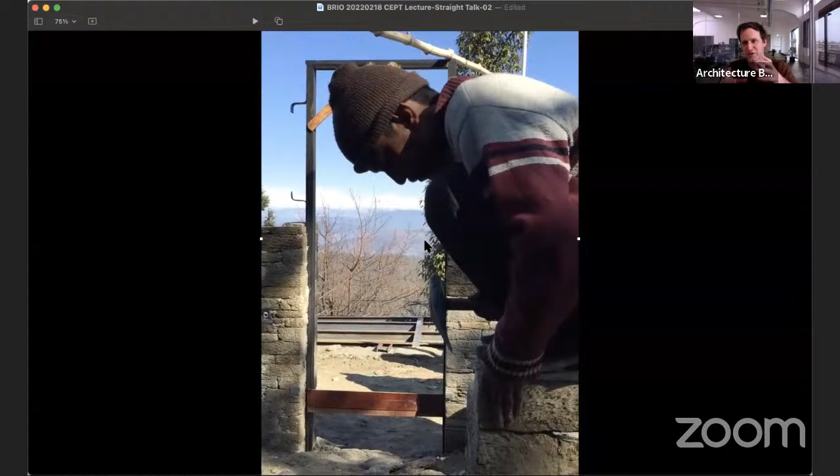This is a part of a wall that we built, built by these men, who are probably all 50 plus, because these are the only ones that know how to do it and still want to do it. All the young people have moved to different professions or moved outside the villages. They patiently chip away here on these rough stones, chipping them into place, and even once it's placed on the wall, it is still dressed and made to fit perfectly.

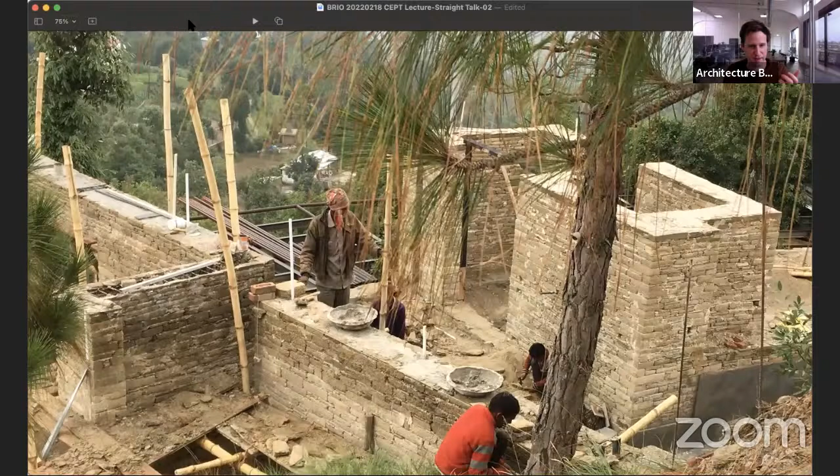The rocks are excavated from the site itself, then dressed and placed on top. At some point when it reaches the datum level of the lintels, a steel beam wraps around the entire contour of the house, and on top of that steel beam you get a very light timber roof. That timber roof is cantilevered on all sides to emphasize horizontality and emphasize the view, the horizon of the mountains.

It's also curved slightly, emphasizing even more that panoramic sense of the mountains beyond. That edge has to be super thin, right? Only by making it super thin can you make it seem very light. But it actually can't be too thin, or at least the roof can't be, because firstly you need structure, and secondly you need insulation, and then you need waterproofing details, etc.

Now I want to explain how, and then you need gutters as well to take away rainwater. You need to take away rainwater not because you couldn't just let it go off the roof, but in this site, water is scarce, it's on top of the hill. Anywhere in the Himalayas you'll find water is scarce on top of the hills. So you need to actually collect that rainwater and harvest it, so you can reuse it again.

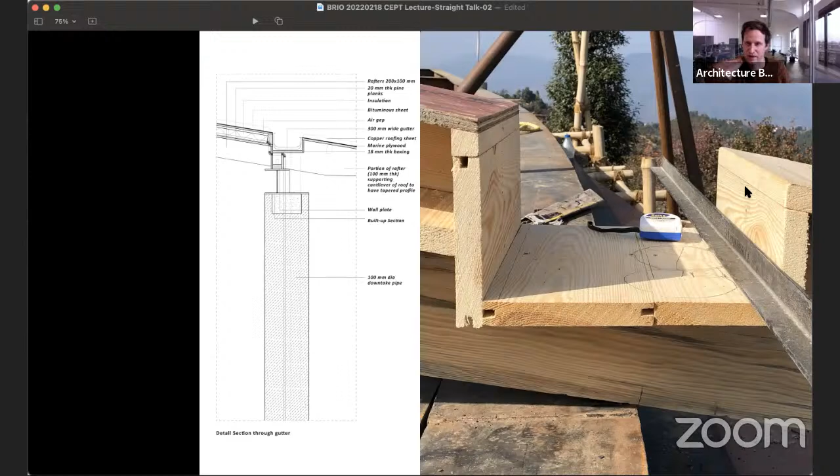But at the junction where the steel edge beam of the wall connects with that timber beam, we don't need that height anymore, and that's where we created a space for a gutter. That gutter is recessed from the wall so that you don't actually see it on the exterior facade.

Here are some pictures of the roof from the top. This roof is finished in copper standing seam. It's a more durable version of what the British used to do with galvanized sheet, because that can corrode. Copper is something that can last 300 years. They're thin sheets, I think 0.6 mm copper sheets, that are folded as trays.

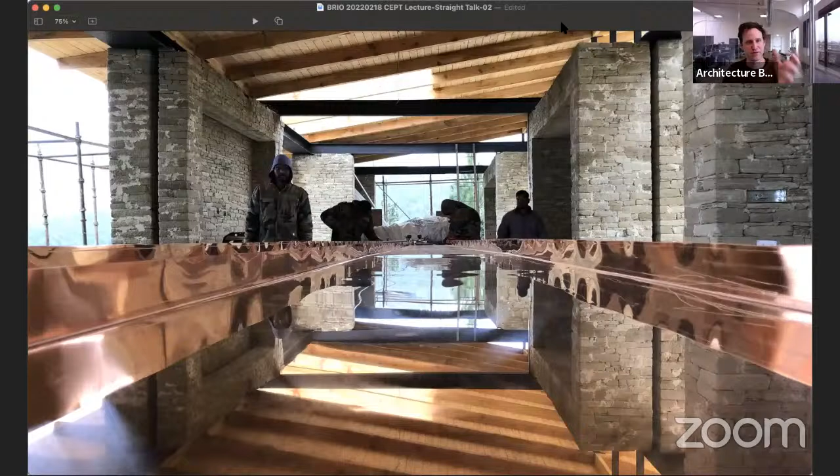Those trays are folded inside the house and then placed on top of the roofs. You see these little clips here that are placed at intervals, folded around the sheet itself. That is placed on top of a bituminous layer, an extra waterproofing, just as a safety factor.

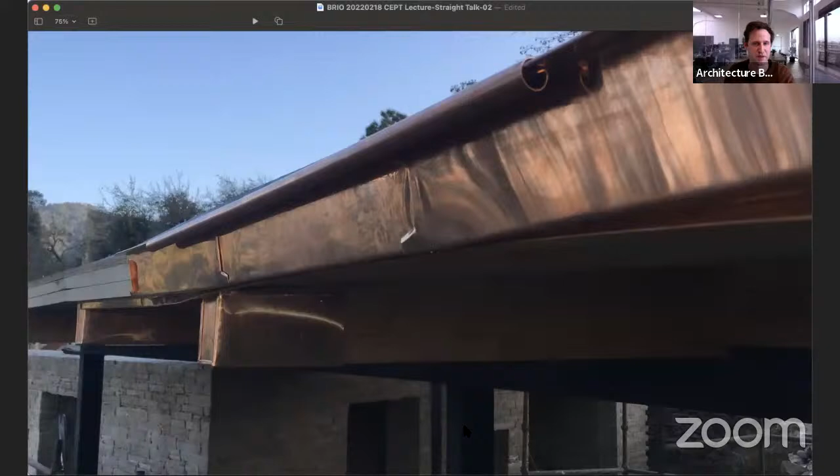Once you place these trays next to each other, you have this little machine that folds the two layers over each other, along with that little clip, which keeps the sheets in place attached to the roof. Then at the edge of the roof, that sheet is again turned around into a fold, into a circular plate, circular end capping.

Here's some pictures of how the copper is also folded around the members, which are again exposed to the rain, which is the pergola. The bottom is still kept visible, and here you see this on the roof, on the top, curving around the direction of the views.

So here it's really a combination of all sorts of different crafts and skills, some that are local and have existed for centuries, some crafts like carpentry that exist but not at this kind of scale for this kind of roof. So a lot of learning and teaching between us and the carpenter happened to be able to make these kinds of spans.

And then the craftsmanship of this kind of standing seam roof is actually made by a French specialist who has been living in Auroville for the last 20 years, who has built up a local team with that kind of skill to build these kinds of roofs in many parts of India. And that's where I would like to conclude today. I'm happy to answer some more questions.